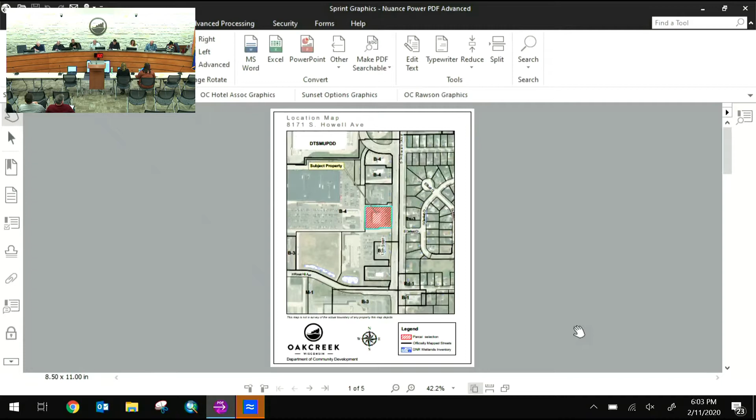Seeing nobody on the third call, we will close the public hearing, and we will go on to 6A, which is consideration of the request for this sign appeal for the Sprint store located at 8171 South Howell. Open it up to the commission.

Mr. Mayor, prior to that, could I give a little bit of background? The master sign plan for this building was actually approved back in '08. The master sign plan only showed signs for 3 tenants. The north tenant was allowed to have 1 wall sign on the east elevation and 1 wall sign on the west. The center tenant, which is Sprint, was allowed to have 1 wall sign on the east. And the south tenant was allowed to have 1 wall sign on the east and 1 wall sign on the south. So this would just allow the Sprint, the center tenant, to have 1 wall sign on the west elevation as well. There are criteria as stated in your packets for granting sign appeals.

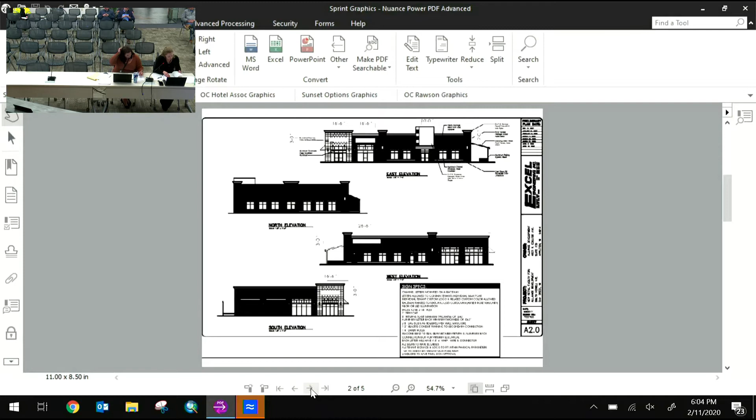Staff does not make any recommendation for sign appeals, and the criteria that the Plan Commission can consider is basically anything other than content. So you can approve sign location, size, and things of that nature. If you do wish to approve this sign appeal, there is a motion for consideration stated at the end of page 2. Thank you, Carrie.

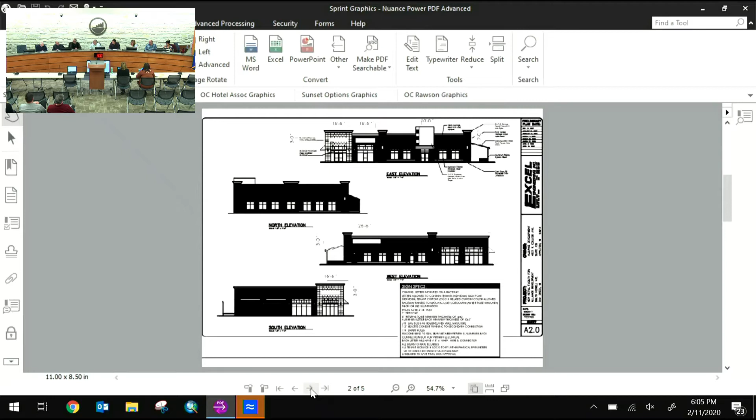Fred: I don't see any problem. I see Buffalo Wild Wings has a sign on the west wall, and I would think there'd be no problem putting the same sign for Sprint. Okay, the size of the sign will match the east elevation if anybody is interested in that particular detail. Anyone else? Don? Chris? Commissioner Sieper, were you here for the last sign appeal?

Christina, anything? Matt? Dawn? I have a quick question - is that door operational? No, that's the service door. Do we need to say that? Does it make it look like it's a storefront? No, I think it actually says riser room on it, or there's some kind of text on the rear door.

Greg? I don't have any issues with it. Okay, just to spread a little history on this, a few of you commissioners might have been around for this. Dawn, you might have been here. Fred, when this building actually went in, we were kind of in our infancy of doing the outer rim buildings, and this building existed. I actually think Sprint was one of the first ones in, I think they actually beat Buffalo Wild Wings in. We went back and forth if they needed that because that was an employee-only entrance, and I don't believe we put it in at that particular time.

But as things have evolved within the city and what we've been doing, I'm fine with it these days. Back in '08, that ordinance that required the particular section of code requiring multi-tenant buildings to have a master sign plan was brand new. We were kind of in our infancy doing signs, it was a new model of building for us. If you've ever been there, there's employee parking on that side of the building, and sometimes that lot's so crowded people are walking around the building.

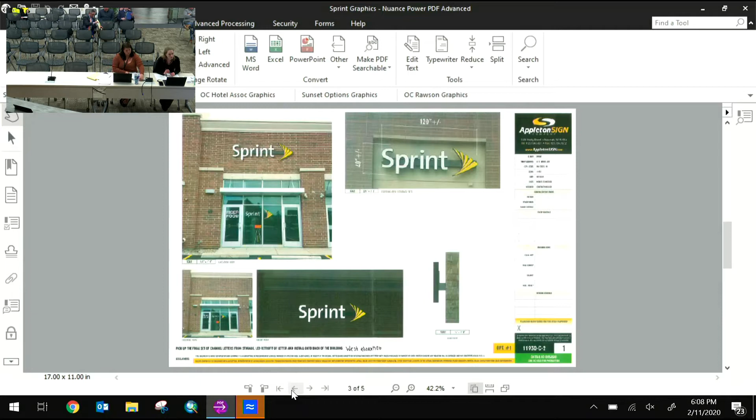Okay, thank you, I completely missed that. Great catch. That will take us - I'm sorry, before we jump to 5B, we're going to stick to 6B if you turn your agenda over. And as Carrie said, it's a review of the proposed master sign plan for the amendment allowing that Sprint sign. So, any questions?

I know Carrie ran over that quick. Don, you're kind of looking like - yeah, so where are we finding 6B on your agenda? It's actually not in your packet that I'm aware of, unless it is. It's a couple in. It's a couple in on the packet then? I guess it's slightly out of order in your packet. That's okay.

But anyhow, that particular property had a master sign plan attached to it, so we have to amend that. Did I say that right? Right, the master sign plan doesn't allow for any signs on the west elevation, so this just brings both of those approvals, the variance plus the master sign plan, together so that they jive.

Odd question, but if it wasn't allowed, how did Buffalo Wild Wings get in? Buffalo Wild Wings was allowed to have one sign on the north elevation and one tenant sign on the east elevation. North? You said west and east. Oh, I'm sorry, the west and the east, not the north. Yeah, okay. All right, clear as mud, eh?

I confused you even more. Yeah, it's one of those situations where the master sign plan still has to be amended. Go ahead, Don, ask your - no, I'm good. Okay, I'm kind of following.

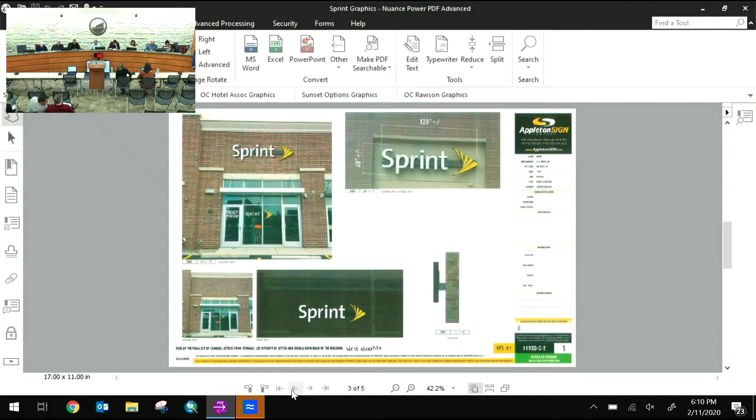Seifert moves that the Plan Commission approves the amendments to the master sign plan submitted by Monica Schneider, Appleton Sign Company, for the multi-tenant building at 8171 South Howell Avenue.

Guzekowski, second. Roll call. Anna, aye. Sullivan, aye. Lorick, aye. Gavich, aye. Guzekowski, aye. Eldani, aye. Seifert, aye. Okay, that'll get us back to the public hearings at 5B, and again, that's a sign appeal for St. John Properties from Monument Sign located at 140 East Rawson Avenue.

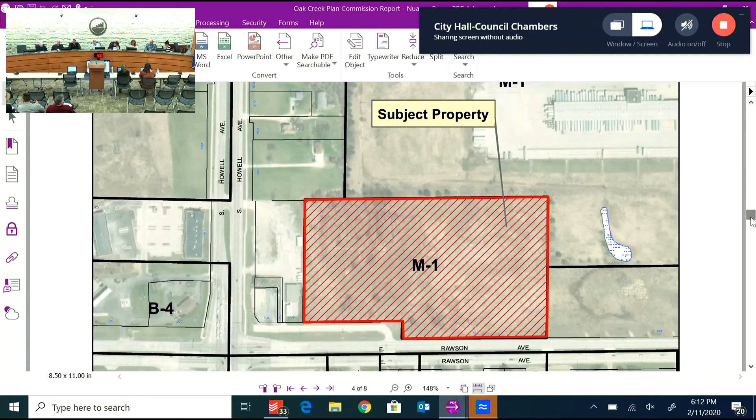We'll now close the public hearing and move on to consideration of that item in 6C. So we'll open it up to the commission.

Questions? Christina? Yes, actually, I do have a question. So I guess I'm not understanding why do we need that variance if we have a certain size that they can abide by? I don't know if the question will be for you or the applicant.

So this actually exceeds the size. I understand, but I'm asking why. Why can't they meet the variance? So this is a directory sign, and due to the number of tenant spaces, there wouldn't be any way to make that smaller and still have the words visible.

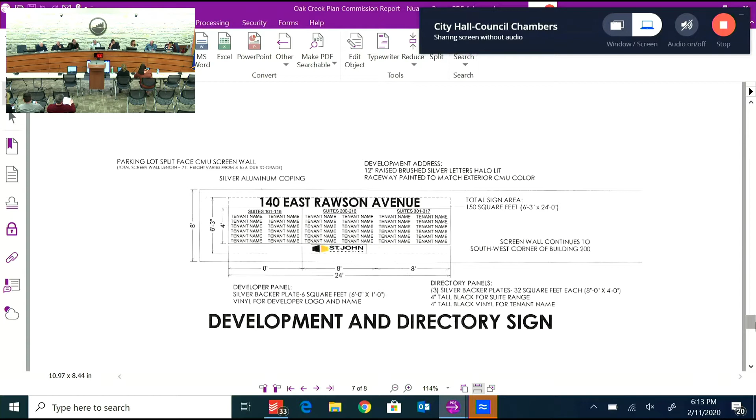And with the location of that new variance sign, would that impact the visibility because it's close to the intersection of Howell and Rawson? The submittal was a little confusing in the beginning. We took it as a ground sign, but technically it really should be qualified more as a wall sign. It's attached to a screen wall that blocks their loading docks, and the wall is connected to building B, so it is set back from the road.

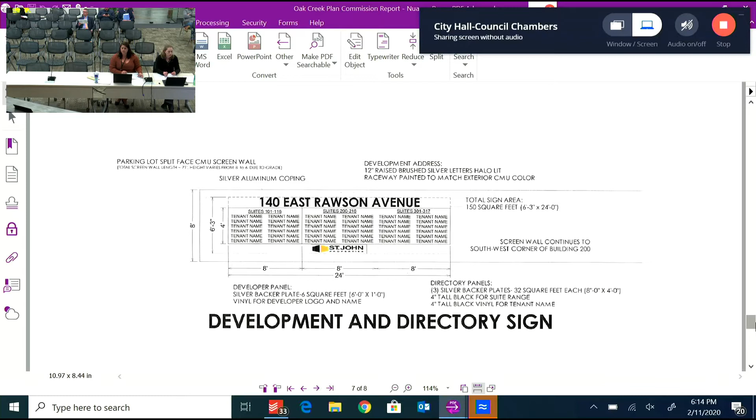All right, that's it. Thank you. Any other questions concerning this particular sign? Fred? Yeah, I just have a question.

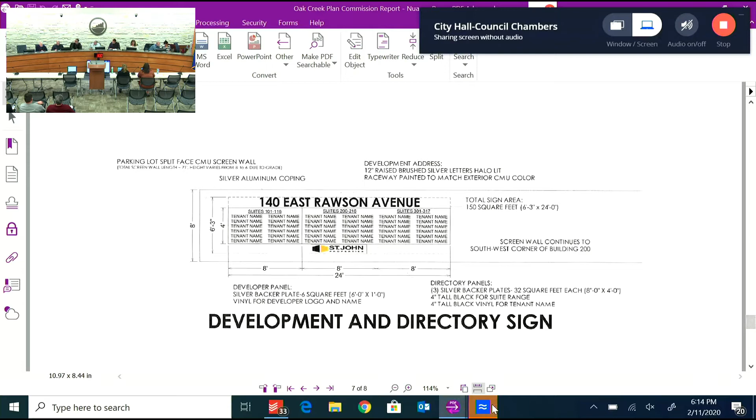I'm just wondering if that sign is big enough to cover the whole facility. That's quite a layout there. There's what, 49 stores or something at that facility? I'm just wondering if that one sign would be adequate enough to cover all of those buildings, or suites, if you want to call them.

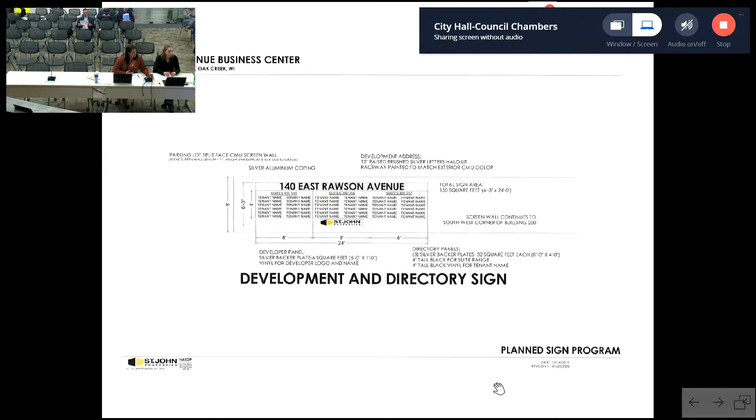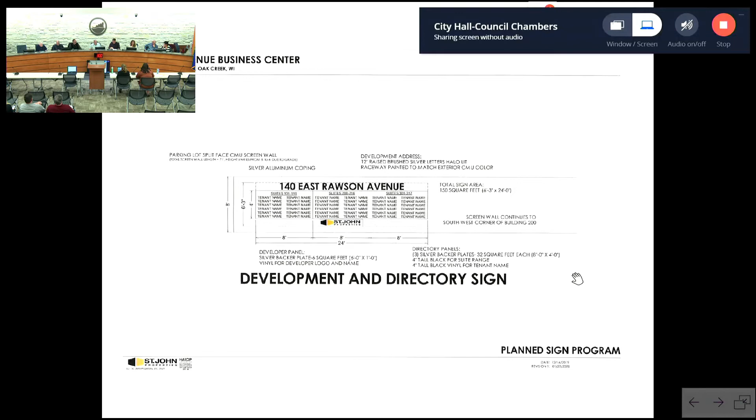Again, kind of something different than we've seen in the past. As Fred pointed out, multi-tenants there. I like the idea of a larger sign. It's tough to see at times. Hopefully it is big enough. I'm not encouraging you to go bigger, but if you feel this works, I'm good with it for the tenants that are involved here. In some cases, as the tenants rent out, they may take 1 to 3 suites, depending on the square footage needed.

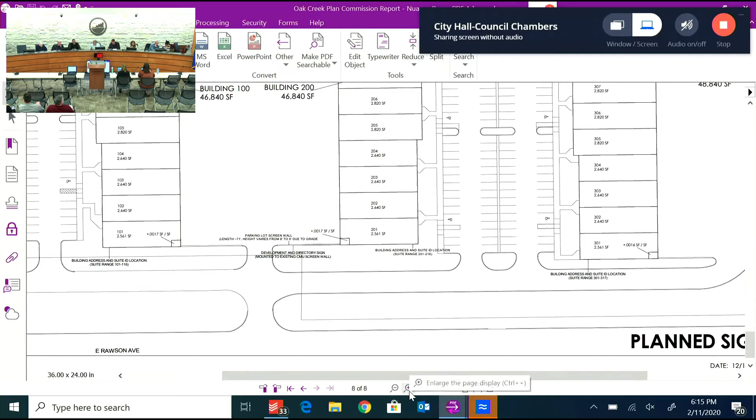Any other questions? Okay, seeing none, motion please.

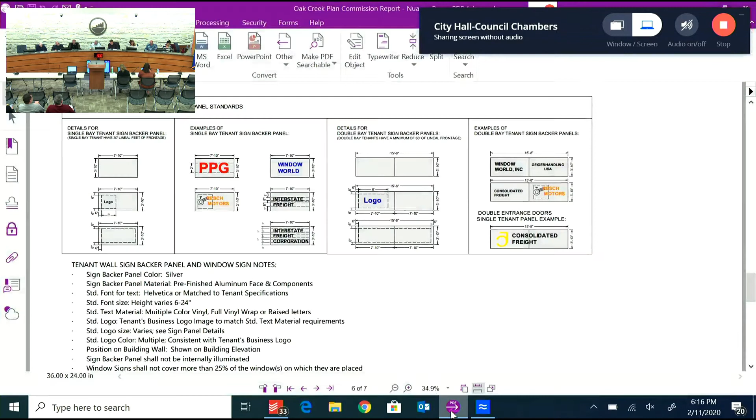Lorick moves that the Plan Commission approve a sign variance allowing the installation of one monument sign of 150 square feet on the property located at 140 East Rawson Avenue. Seibert seconds. Roll call. Sullivan, aye. Grillo, aye. Lorick, aye. Gavich, aye. Guzekowski, aye. Ladani, aye. Seibert, aye.

And item 5C, our last public hearing, again a sign appeal. I'm sorry, Mayor, could I stop you? This also is similar to the previous. Go right ahead. We do have a sign plan review attached to this as well, that is 6D in your packets. So you need a variance on that? No, this is a sign plan for review, the master plan at St. John Properties. So same situation we experienced with the Sprint store. I'll open it up, questions from the commissioners.

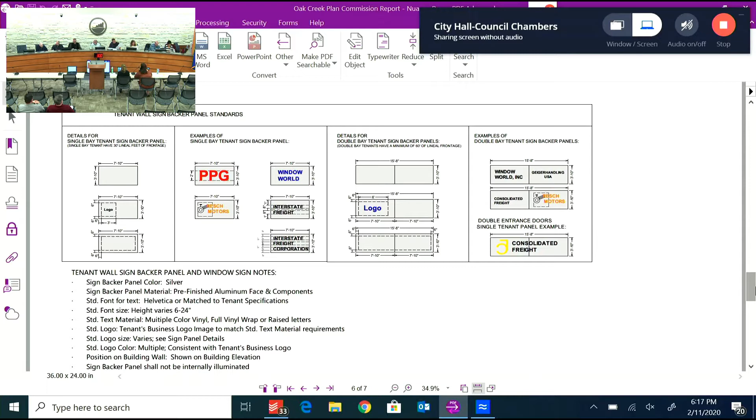So the sign plan review shows the tenant signage above each tenant space. Some have just one bay, and there's a specific signage requirement for that. Sometimes 2 bays are combined to make a larger space for tenants, but there'll still be allowed signage over the tenant space and their entryways.

For me, no questions. Yeah, I have a quick question.

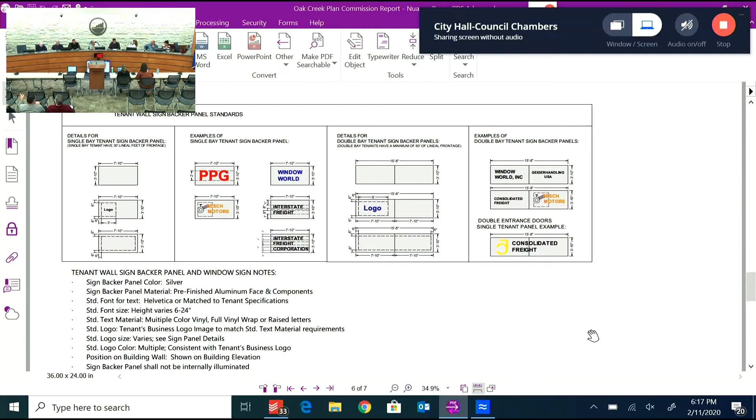So is this backlit? Are these lit? I confused you, we're actually on 6D. So we're at St. John's, I'm at the property. Okay, yeah, look at this. Okay, so you're going back to the sign. Yeah, okay, just the individual signs that are above each suite, are those lit?

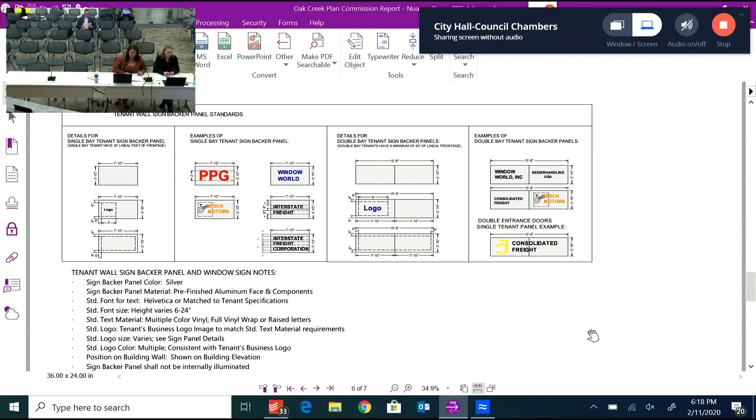It says that there is a non-illuminated metal backer plate that will be installed by the developer. I'm assuming that each bay, though, has an illuminated sign. And you're saying bay but meaning like suite? Or each tenant suite. Okay, okay. I wasn't sure if you were talking about a truck bay.

Any other questions? No question. All right.

6D then. Guzekowski will make a motion that the Plan Commission approve the master sign plan submitted by Dustin at Kulowski at St. John Properties for the multi-tenant building development at 140 East Rawson Avenue.

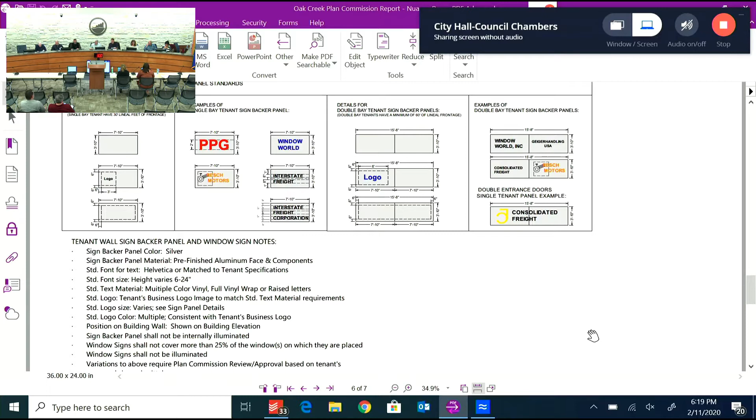Lorick will second. Roll call. Aye. Sullivan, aye. Grillo, aye. Lorick, aye.

That'll get us to our last public hearing, which is... oh, I'm sorry, I guess I got to vote. That's okay, yeah, this is not working really well here for me. Aye. Guzekowski, aye. Ladani, aye.

Seibert, aye. Yeah, I got thrown with the backlit question because we were talking about the master plan. Never mind, okay, never mind. That's on me, that's on me, my bad.

Anyways, okay, we'll fly straight here. 5C, it's a sign appeal. Again, sign appeal for the east elevation for the building at 9700 South 13th. Okay, Lori?

Published January 22nd, 2020. City of Oak Creek, notice of public hearing before the Plan Commission. A public hearing for a sign appeal will be held February 11th, 2020 at 6 p.m. at Oak Creek City Hall, Common Council Chambers, 8040 South 6th Street, Oak Creek, Wisconsin, 53154. Appellant is Ryan Companies, Candace Falk. Tax key number is as noted. Property location is 9700 South 13th Street.

The request is for a variance from section 17.0706, which states that wall signs shall be no more than 200 square feet for buildings more than 300 feet from the street or interstate right-of-way, and the total number of signs on any one premise shall be limited to one wall sign per tenant per street frontage. If granted, the variance would allow the applicant to install one 10-foot by 33-foot wall sign on the southeast corner of the east elevation at 9700 South 13th Street. The zoning of the property is manufacturing district planned unit development. All interested persons wishing to be heard are invited to be present, dated this 15th day of January 2020, Plan Commission, City of Oak Creek, Wisconsin.

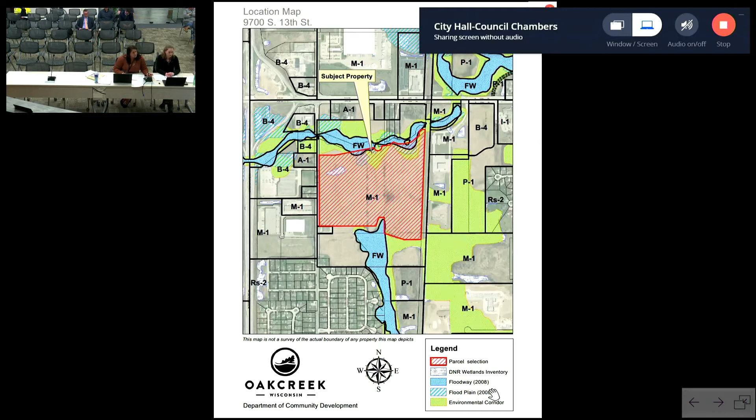This is a public hearing. All those wishing to provide comments on this matter shall approach the podium, state their name and address, and address their comments to the Plan Commission. This hearing's open. Thank you, Lori.

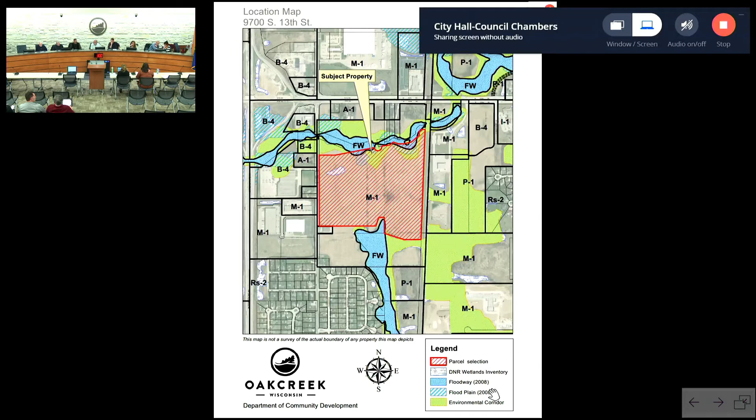We will make 3 calls, this being the first. Second call. And third and final call. We'll now close the public hearing.

Double check where I'm going. 6E is what we're looking at now, and that is consideration of the sign appeal. So open it up for questions from the commission. We touched on this briefly at the last meeting, I believe.

Correct. Yeah, I'm just trying to remember, the minutes don't go into too much detail, and I don't have anything from last meeting. What's the relation to the one from last week? Is this the same sign? Essentially, help me out with this. It mimics one of the similar signs on the opposite side of the building.

The difference is that this is not facing a roadway, and it is on a large scale, 330 square feet, so it does exceed the maximum. This is a different part, this is the east side. We didn't cover that last week, I guess. No, we just focused on the west elevation last time. All right, thank you.

Christina, so this is facing the resident behind it, right? There's a resident area there? Correct, and the railroad tracks. Yeah, and you say this is a very large sign, 330 square feet, and we do have on the screen what it looks like for the elevation. So why do they need it on the east end if it's really not facing a roadway or anything? What's the purpose, I guess? In their narrative, they said that they wanted it for passengers on the train.

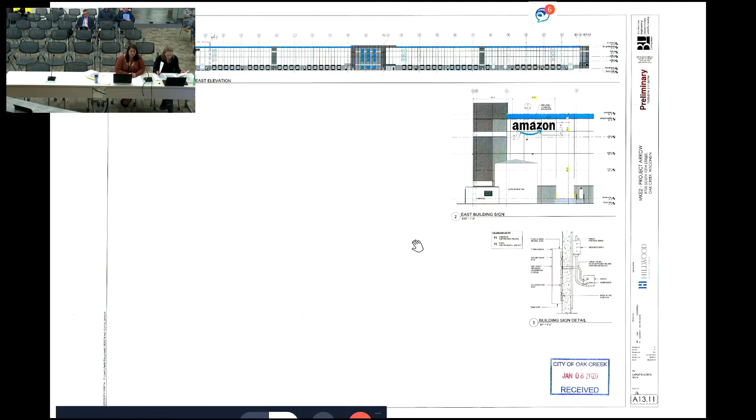Add anything? Don? What about you, Greg? Chris? Don? No. What about you, Fred? No. Okay.

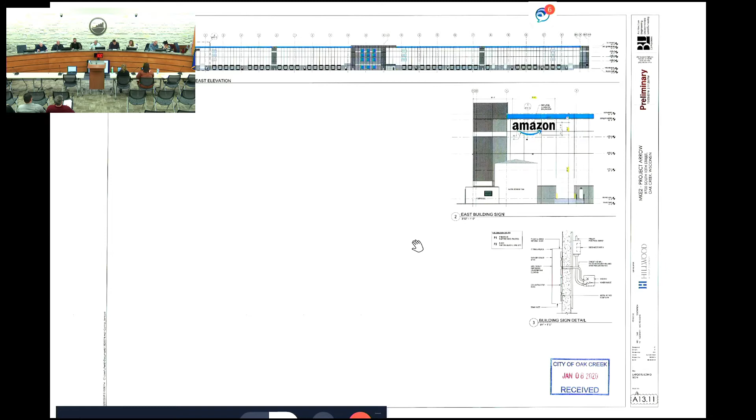Seifert moves that the planning commission approves a sign variance allowing the installation of one 10 feet by 33 feet wall sign on the east elevation at 9700 South 13th Street.

Guzekowski will second. Roll call. Anna, aye. Sullivan, aye. Real, aye. Lorik, aye. David, aye. Guzekowski, aye.

Donnie, aye. Seifert, aye. All right, 6F, it'll give you something different to consider - a certified survey map for the properties at 7869 South 13th Street.

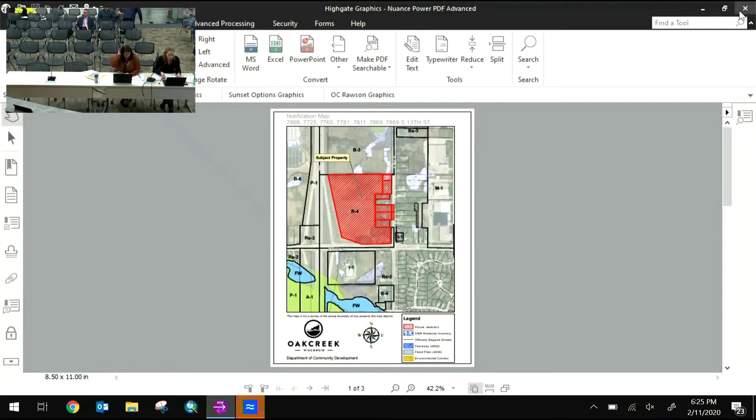Gary? The proposal is to divide the property, which unfortunately is still shown in multiple pieces. It is one piece. The proposal is to divide it into 3 conforming lots for the district.

There are wetlands shown on the property on sheet 2. However, wetlands should be shown on all sheets of the CSM. There is some language for an access easement, and for clarity and consistency purposes the same language should be used as was shown on CSM 9148 - that language is cross-access easement area. It's slightly different on the proposed CSM.

Stormwater ponds are also on Lot 3 in 2 spots. There was a question as to whether or not those stormwater ponds should be shown as outlots on this CSM or if they should be shown on a subsequent CSM.

The benefits to showing them on this CSM would be combining the divisions on one map rather than several over many months or even possibly longer. It would potentially include easements for the benefit of, and the maintenance responsibilities per lot for, the stormwater infrastructure, and it would also prevent potential encroachment of development into these stormwater facility areas.

To get at this though, rather than dividing the individual lots, it is possible that we just change the language on Lot 3 to Outlot 3 for now, with subsequent divisions happening at a later date that could change and you could create lots still. It will be up to the Plan Commission to determine whether this will be a condition of approval, or if we're going to designate the stormwater infrastructure on a subsequent CSM as outlots.

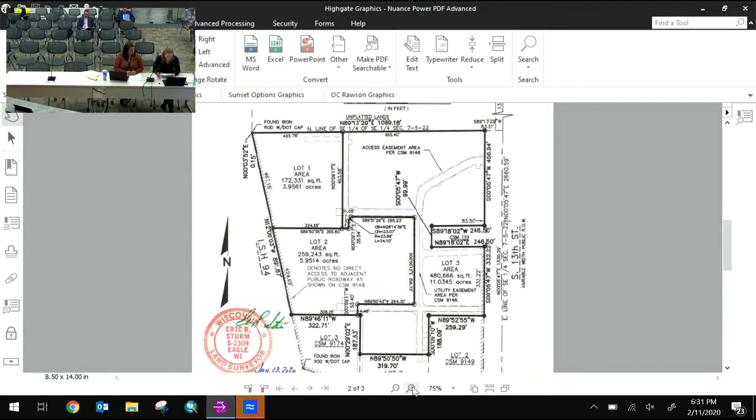So in that case, I would suggest an additional condition that Lot 3 is changed to an outlot prior to recording.

Ready to go? Motion? Lorick will move that the Plan Commission recommend to the Common Council that the certified survey map submitted by John Thompson Highgate LLC for the property at 7869 South 13th Street be approved with the following conditions.

Number 1, that the CSM is revised to incorporate all wetland areas on all sheets. Number 2, that the CSM is revised to incorporate the same language for the access easement as was shown on CSM 9148. Number 3, that all technical corrections, including but not limited to spelling errors, minor coordinate geometry corrections, and corrections required for compliance with the municipal code and Wisconsin statutes, are made prior to recording. Number 4, that Lot 3 be changed to Outlot 3 prior to recording.

Seifert seconds. Roll call. Hannah, aye. Sullivan, aye. Carlo, aye. Lorick, aye. Gavich, aye. Guzekowski, aye. Tanya Seifert, aye.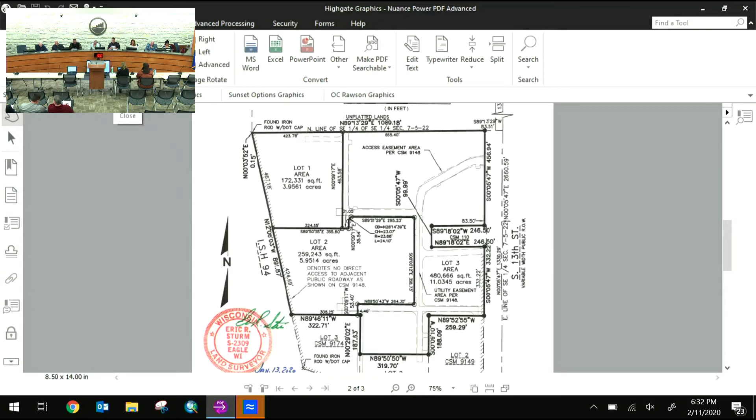Okay, 6G, review a request from Hotel Associates for a conditional use permit for a hotel on a property at 9315 South 13th Street. Carrie? The proposal is for a hotel, a new brand called the Avid Hotel.

Plan commissioners will recall that a PUD amendment allowing hotels within this particular area was approved by the Common Council on January 7th of this year. We still need those signed conditions and restrictions prior to any further review of a proposal for the hotel on this property, but we did incorporate the conditions and restrictions approved by the council in your packets for reference.

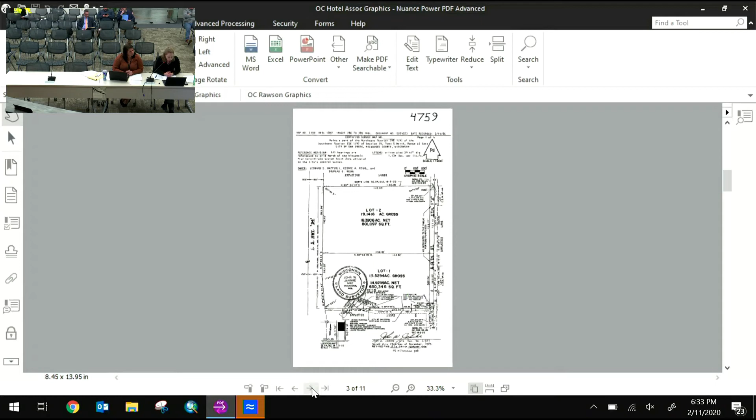The plan is for a 95 guest room hotel in a 4-story building. It's a mid-scale hotel under the Avid Hotel brand, a franchise of InterContinental Hotels Group, or IHG. The plans currently include a workout room and gym facility on the first floor. There are an estimated 25 full-time equivalent employees anticipated, and this will be a 24/7, 365 operation.

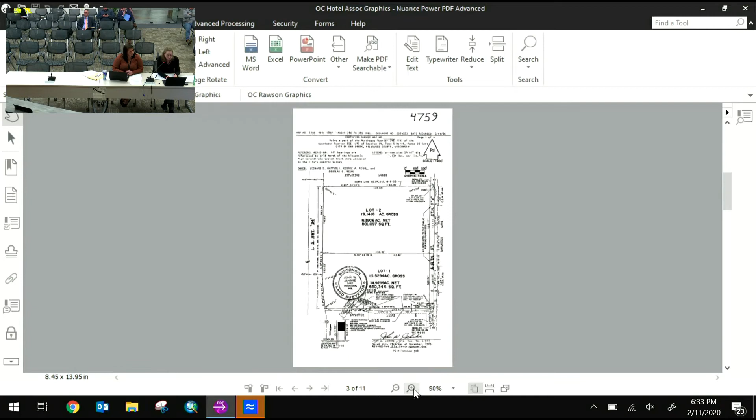This gives you an idea of how the access will be configured for the proposed hotel. This CSM shows the division between the hotel lot and the Steinhafel's lot. If you look at the very bottom of Lot 1, that includes utility and cross-access easements. That's how the parcel will be accessed from 13th Street, sharing the existing access with Steinhafel's.

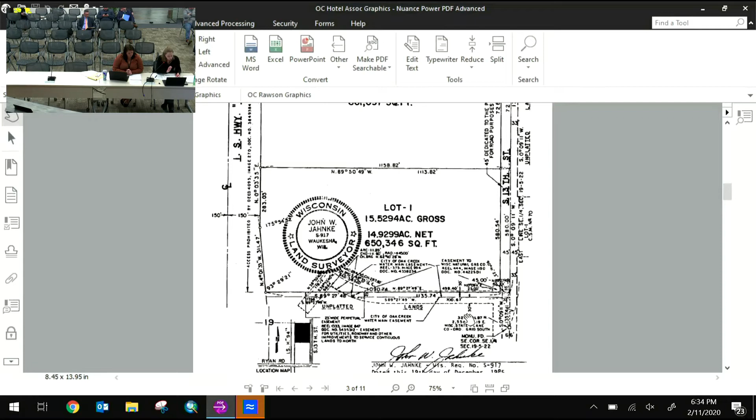They're also showing a total of 100 surface parking stalls for the hotel. Anticipated construction is to begin in the spring and summer of 2020, if approved, and be completed in 9 to 10 months, with a projected open date of summer 2021.

Minimum parking requirements for motels and hotels are calculated at 1 stall for every room or suite, plus 1 stall for every peak shift employee, plus 1 stall for every 3 persons based on max capacity for each public meeting or banquet room. But there are no public meeting rooms or banquet rooms proposed in this hotel, meaning they would need a minimum of 120 stalls per code.

Since the concept plan shows 100 stalls, it would be at the Plan Commission's discretion to determine whether this is adequate. I'll mention that the narrative supplied by the applicant included information on hotel occupancies in the area. Assuming the proposed hotel would experience roughly the same occupancy as similar mid-scale hotels in the area, at 68.7% per their submitted narrative, approximately 65 rooms would be occupied at any given time. That type of occupancy would require a minimum of 90 parking stalls, so we're somewhere between 90 for the majority of rooms occupied and 120 at max capacity.

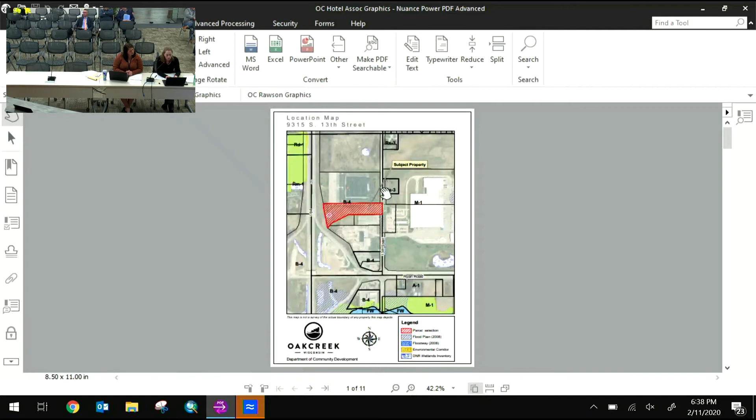Okay, questions from the commission? Christina? I have a question. I see two access points here off of 13th Street. Are they both entrance and exit, or one entrance and one exit? Actually, this is a little confusing. The entrance is actually over on 13th Street here. What's shown on the site plan is actually two access points off of that internal access drive shared with Steinhafel's. So what you're seeing to the north is actually Steinhafel's parking lot. So there's only one access from 13th Street.

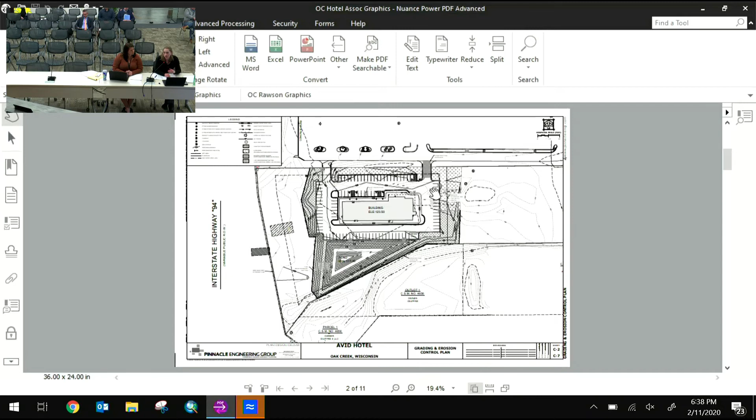Correct. How about, did we look into left turns into that property, since it doesn't interact with the actual road because there's no median there? So where are people going to start to turn left in? That information has not been provided at this time. However, the CSM did provide that common access. So if there's any requirement per the county for turn lanes or any modifications to that access, we would require a copy of that approval and those requirements. I just want to make sure that's being looked at while we're approving the CSM that's being applicable. Obviously, whatever the county requires, they're going to require.

Sorry, Chris, you had something? Yeah, couple of questions I have. So the green space, I agree, Mayor, I'm concerned about that, but I'm glad we have, what's it, 30% we need to have, or 20? Is it 30? 30, yeah. This is kind of a fresh look for this side of town with having a hotel.

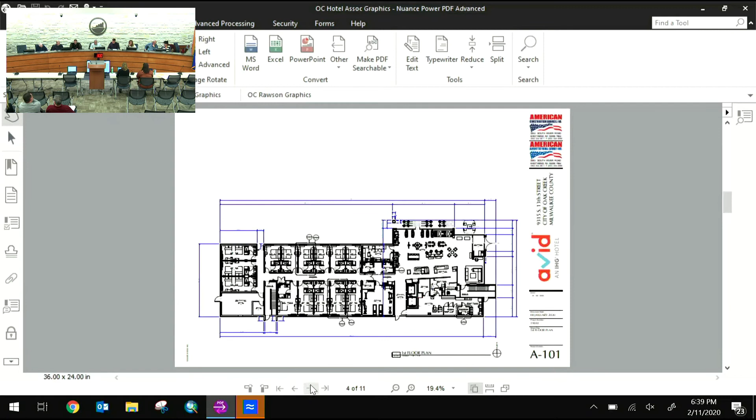One of the concerns I have is, could it ever be turned into, or if it were ever sold and used as an extended stay? Is there any language we can have in the document that prevents it from becoming an extended stay? You can explore that option as part of the conditions and restrictions. Unfortunately, I don't have any kind of language I can provide you at this time.

And I do think it is a nice, fresh look, very contemporary. Typically, the types of amenities provided in extended stay hotels don't necessarily include things like pools and fitness facilities. That might be one way of getting at it, but again, those are just ideas. We would have to speak internally about what the language would be in the conditions and restrictions.

Yeah, and that's my concern. My hunch is right now, obviously, it's not going to be that, but down the road, I know residents who have contacted me about it. Back in the day, there were other conversations about an extended stay on our side of town, and they weren't happy about it.

And mixed opinions about this now, but it's been approved by the council, so I think it's a good fit for what we've got here.

Anyone else? Don, more of a procedural question. So we're looking at a motion to approve the conditional use permit, come back with the conditions and restrictions, and then a public hearing before it goes to the Common Council?

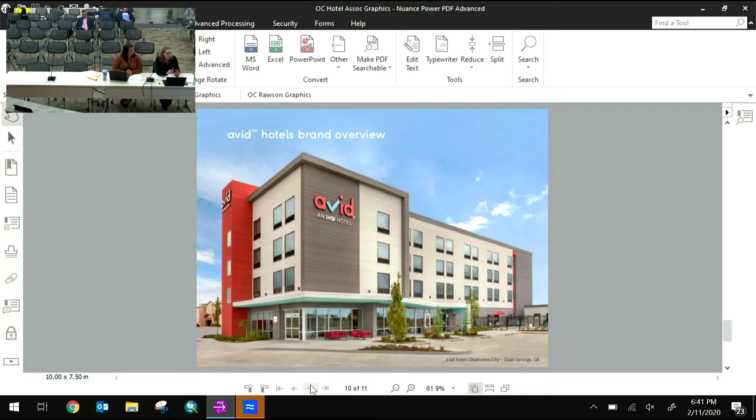Okay, and then any subsequent review that would be required following Common Council approval at the public hearing would come back to the Plan Commission. So site, architectural, all that kind of thing would normally come back to the Plan Commission as well. Okay, thank you.

Matt? Dawn? Greg? How about you, Fred? I think I'm okay.

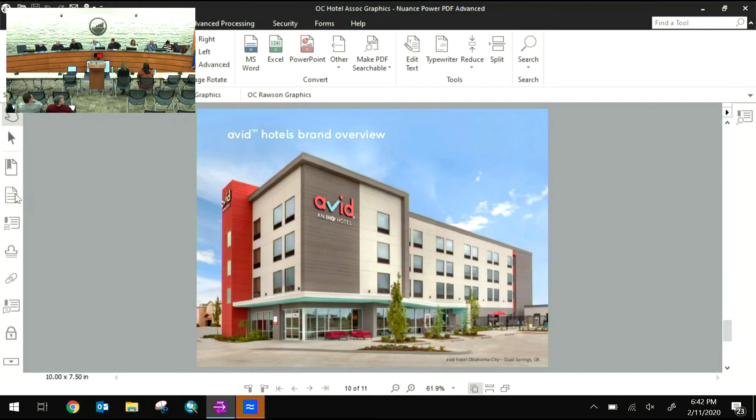May not be the greatest question in the world, but Assistant Chief Havey, any concerns about the parking and your accessibility with one entrance off 13th? I know you could always utilize the north entrance of Steinhafel's as well, but given the sea of parking and if they do load up, any concerns?

Have you worked with them yet? Mike Havey, Assistant Chief. We have not worked with this group yet. Access is always a concern, but with Steinhafel's and those access lanes on each side, and then the two access lanes that are in the plans right now have access lanes on either the east and west side. Parking restrictions and access are always a concern for firefighter operations. Nothing specific to this plan yet, though.

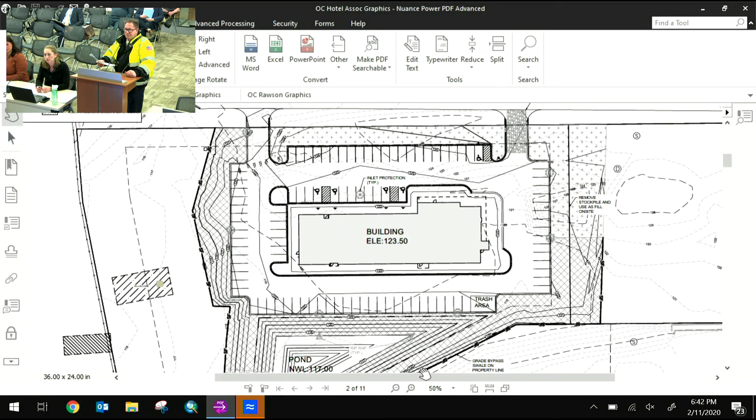Okay, thank you. No, I think Christina brings up some valid stuff on 13th. The county is planning on redoing that road in the near, far future, who knows when. But 13th will get reworked, and hopefully we'd get a turn lane in there at that particular time. So I have nothing other than that.

So, motion then, please, on G. Guzikowski makes a motion that the Plan Commission recommends the Common Council approves a conditional use permit for a hotel on a property of 9315 South 13th Street after a public hearing and subject to conditions and restrictions that will be prepared for the Plan Commission's review at the next meeting.

Seipert seconds. Roll call. Anna, aye. Sullivan, aye. Brillo, aye. Lorick, aye. Gavich, aye. Guzikowski, aye. Donnie, aye. Seipert, aye.

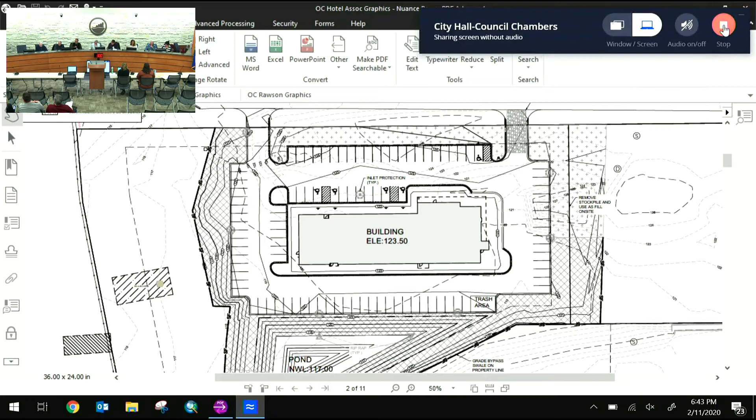Gets to 6H, and it's a temporary use permit for Ozinga for a temporary portable ready-mix concrete batch plant and crushing operation at 841 West Rawson. Lori.

Did I get it right? I got it right. I'm catching on to this stuff.

Ozinga Ready Mix Concrete is requesting a temporary use permit that would allow for a concrete crushing operation on the property located at 841 West Rawson Avenue until December of 2020. Plan commissioners may recall that they've come to us several times for the same permit request, once on March 13th of 2018 and another on September 10th of 2019. The previous request just expired at the end of 2019.

Since then, they've approached staff to issue 3 consecutive 14-day temporary use permits for the same crushing operation. They'd like to bring in front of you the possibility of extending and having a longer temporary use permit that will go to the end of 2020 to meet crushing demands. The details of the operations are all found within your packet.

Staff would like to mention, though, while the proposed use is suitable at this location and is consistent with the existing permanent use of this property, staff would like to suggest that the number and duration of temporary use permits makes this use no longer temporary. Staff will work with Ozinga to find a more permanent solution through the conditional use process. And then a suggested motion is provided for you.

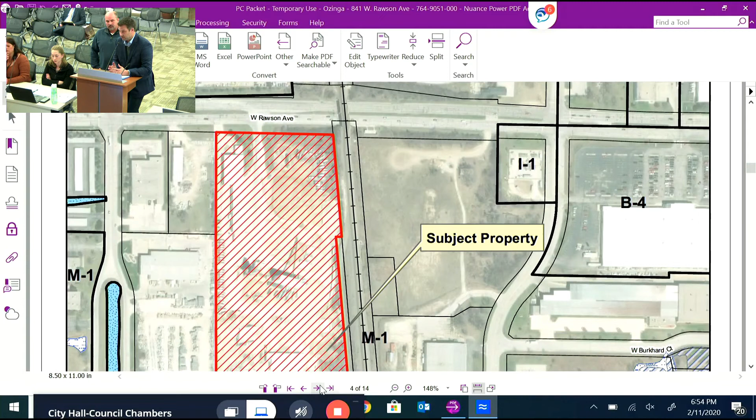I'll take a look at things first thing tomorrow morning when I get back into the office and talk to the operations manager. If it's freezing temperatures, the street sweeper just isn't going to be there, but we're typically not crushing in those conditions either. And it makes sense, I agree, it's not going to be a sweeping truck behind every single hauling truck, so that doesn't make sense. But at least at the end of the day, there should be one going around by the end of the hauling schedule. Absolutely.

Again, I think I'm okay with the time limit on this, coming into the busy season. These portable batch plants aren't unique to Oak Creek — they're going up all over the place along I-94 where needed, basically to limit the hauling and make it more efficient. So I'm okay with the operation.

So, okay. Motion then. Donnie moves that the Plan Commission approves the temporary use permit for a temporary crushing operation at 841 West Rawson Avenue with the following conditions.

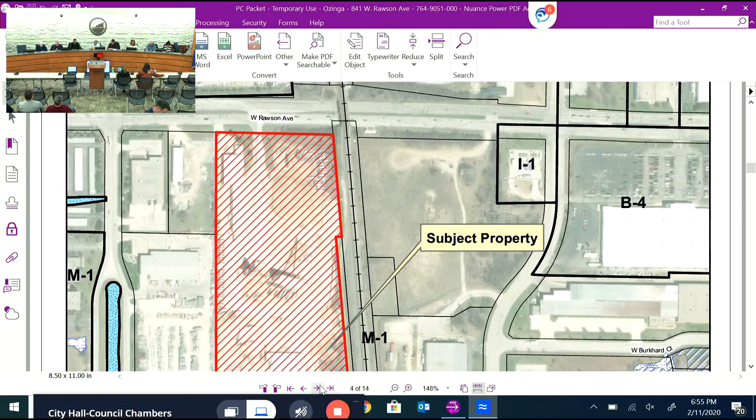That all applicable building and fire codes are in effect. That the hours of operation for crushing be limited to Monday through Friday between 7 a.m. and 4 p.m. That the temporary use shall expire on December 31st, 2020. That the crushing is limited to Ozinga concrete, with no materials from other properties or work sites brought to the site. That on-site airborne dust and debris control measures are utilized throughout the operation. That stockpiles are restricted to the locations shown on the approved site plan and may not exceed 30 feet in height. That any truck traffic associated with the temporary use is restricted to state and county highways.

That a street sweeper is utilized a minimum of once per day. That the property is returned to its original condition, with all temporary equipment and stockpiles removed within 14 calendar days following the expiration of the temporary use permit.

Seibert seconds. Roll call: Anna, aye. Sullivan, aye. Will, aye. Lorick, aye. Kavich, aye. Guzikowski, aye. Donnie, aye. Seibert, aye. Thank you, guys.

Next, we have a plan review for an addition to Sunset Options for the building and the property located at 904 West Rawson Avenue. Carrie.

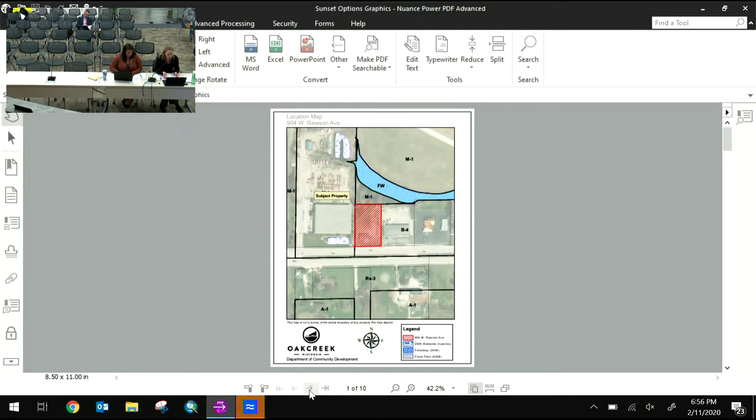This is an addition to the existing building, and the purpose is for chapel, restrooms, and a lobby reception area on the north side of the property.

This is an existing layout for the site, and what is proposed is this addition here. This is going to be a 51-foot by 35-foot addition on the north, connected to the existing building via a small alcove and mechanical room. There's also going to be a covered canopy area for the drive on the east side. You can see the island there.

Minimum parking requirements are the greater of one space for every 4 patrons at max capacity, or 25 spaces per chapel unit, plus 1 space per peak shift employee. So the chapel can accommodate 60 to 75 patrons, which would be 15 to 19 parking stalls. Per the information provided by the applicant, there would be at least 1 employee during regular operating hours, which are 8:30 to 4:30, but additional employees may be required during services or visitations.

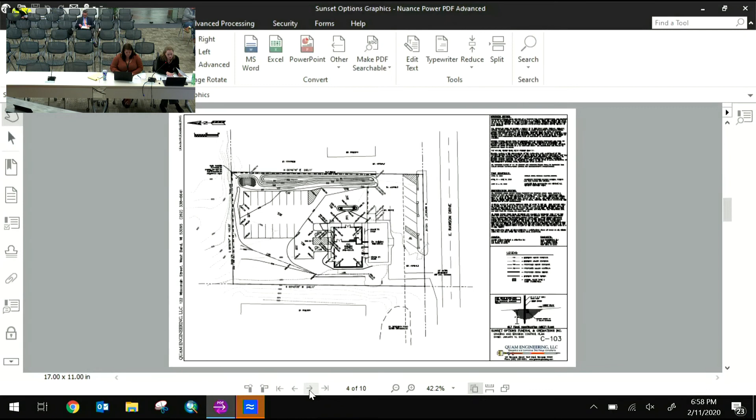As proposed, everything meets setback requirements. The proposed exterior building materials for the addition will match what is existing for the building. That includes manufactured stone veneer along the base, which has to be a minimum of 4 inches per code. That requires a 3/4 majority approval per code for the use of manufactured stone as opposed to natural stone. There's also going to be wood siding to match the existing, which is also not listed as an approved material. However, with a 3/4 majority approval of the Plan Commission, that can be approved. And then asphalt shingles to match.

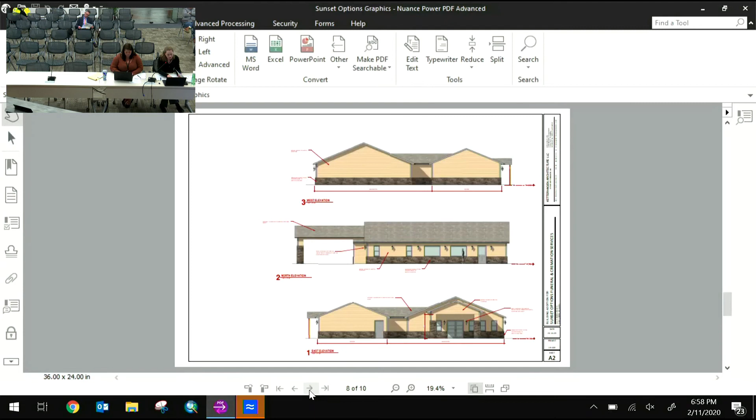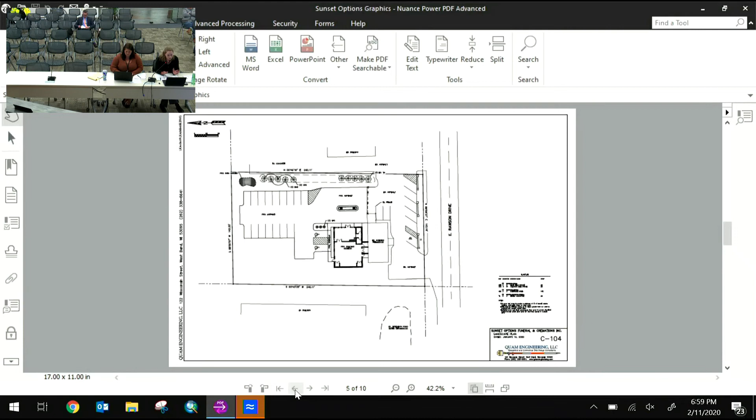In the landscape plans, they do not actually show any mechanicals, save for an existing gas meter on the west side of the building currently. If there are any mechanicals, they must be screened, be that ground, building, or rooftop. That includes transformers, that includes any kind of mechanical equipment itself, basically anything that would be considered a box, for lack of a better word.

This on the screen right now is the proposed landscaping plan. What you can see here is that there is some existing landscaping on the east, and then some proposed on the northeast. Code requires that parking lots serving more than 5 vehicles shall be provided with accessory landscaped areas, which may be landscape islands, peninsulas, or peripheral plantings totaling not less than 5% of the surfaced area. In other words, we need a little bit more landscaping shown.

Also, there are some details missing that are required per code. That includes plant coverage, planting height versus mature height, spacing, those kinds of details. So we will work with the applicant to ensure we get a landscaping plan that meets the code requirements.

We also have green infrastructure requirements. Those are being coordinated with the neighbor as well as with the city. We have a request for well abandonment to be coordinated with the utility and with inspection. They are considered a utility customer, so that's something they'll have to coordinate with the city. The fire department has given us some indication that they will need to review the fire suppression requirements. It was not clear at this time what those would be.

If the Plan Commission is satisfied with the proposal, there is a suggested motion that the Plan Commission approves the site, building, and landscape plan submitted by Leroy Stewart Sunset Options for the property at 904 West Rawson Avenue, subject to conditions 1 through 7.

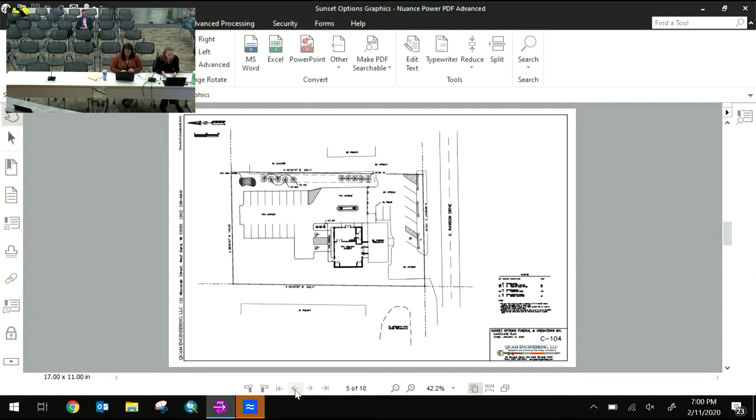Chris? I'll say that I'm excited to see that. It seems like, I don't know, maybe last year, but probably a lot longer than that. But 2 years ago, you guys were just here to get some other work done, and now you're here to add on. So you were going to spruce it up to start. You guys are doing a great job over there, and it's just great to see you want to put the money back into Oak Creek and call Oak Creek your home. So thank you very much. It's a good-looking building.

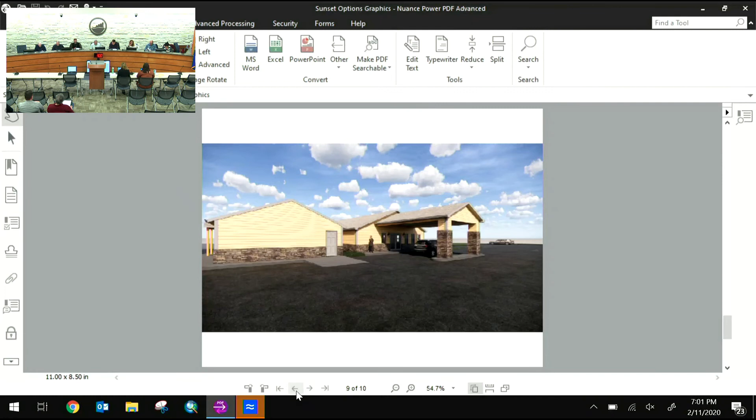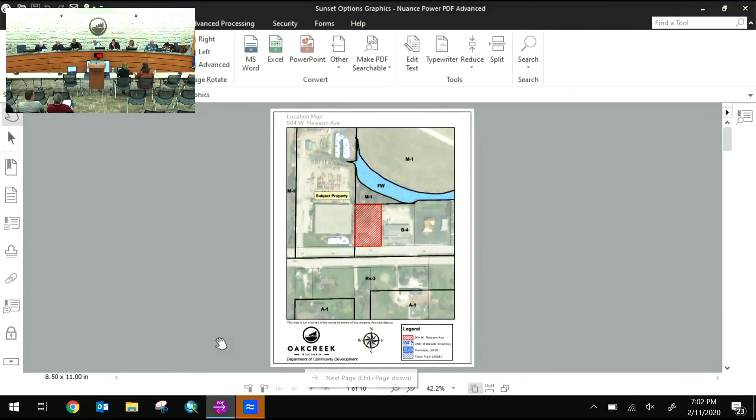Is there a rendition of the south? The view of it from the south, looking north? Or is that east? I don't think we have an exact rendering, but...

It almost looks like it's going to mimic what's already there. Yeah, I guess what I'm looking at is what I take as the existing building with that single door before they have the drive up. That'll be, I mean, it's facing east, correct? Okay, oh I'm sorry, I'm not following you.

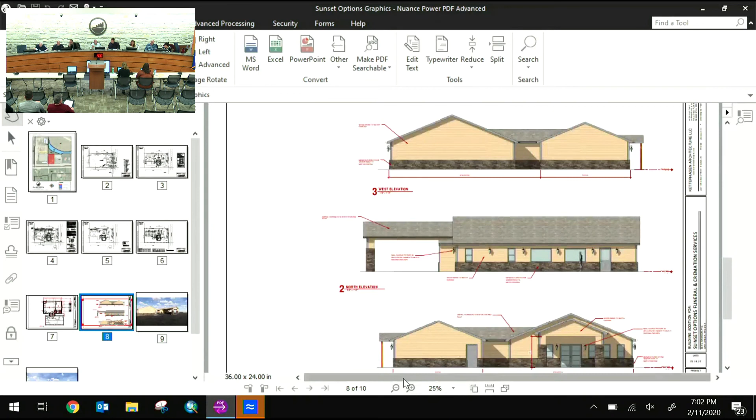But what's going to be the view if I'm standing on Rawson looking north at it? Is that the view? This is the east elevation. Okay, right, yes. So this would, if you can bear with me for a second, I'll bring up Google Street View.

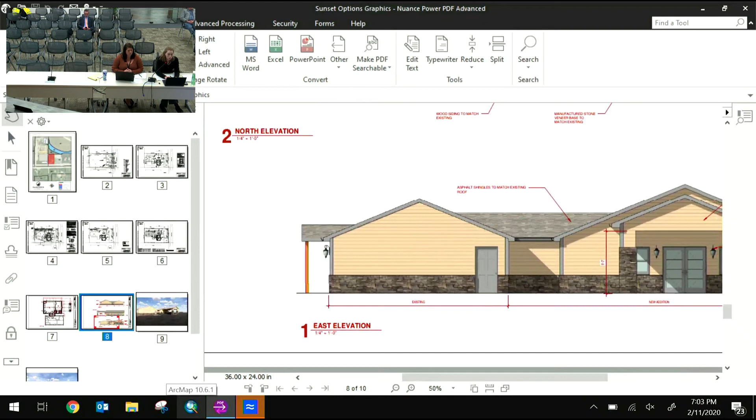Kind of weird, we got 2 elevations and there's actually 4, right? Well, the addition is on the north, so that's why you only had the 2 elevations.

So this is what the existing building looks like. Everything's going basically to the back, everything's going to the rear, which is the north. So if you can see where my cursor is, that's where that new addition will be.

See the drive-through canopy sticking out on the side, and the addition. That one side was just kind of blank. Looks okay.

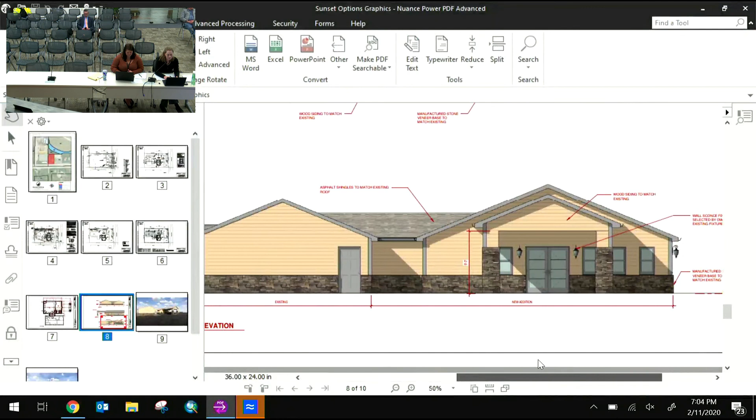Thank you for that, I needed the visual. Tough night for me. So I have nothing else. Again, unique little business and love to see it growing. As Chris said, you guys are just in here for a remodel. Yeah, come on up please if you want to say something.

So actually, Mr. Mayor, I think this is the rendering that you were looking for. Yeah. You want to say something, sir? Just name and address please, for the record. Steve Ketterhagen, architect of record, 2821 Virginia Street, Racine.

I would like to address condition 2, requiring 4-inch stone. 2 years ago, we did use a 2-inch stone veneer, and we were not aware of the requirement for 4-inch. So we wanted to match the existing materials, and we would like to continue to use the same materials we used 2 years ago.

Man, that one's a touchy one with us, ain't it, Carrie? If it's to match the existing, and if we have at least a minimum of 2 inches, the Plan Commission does have the discretion to grant a modification.

When we get into the drive port or the vestibule, whatever you want to call it, on the columns, could that be 4 inch? We could investigate that, it's possible, but we want the product to match as well. For sure, I get it. You want the belt line to match up, but if we could try to get as much of it right as we can, that would be appreciated.

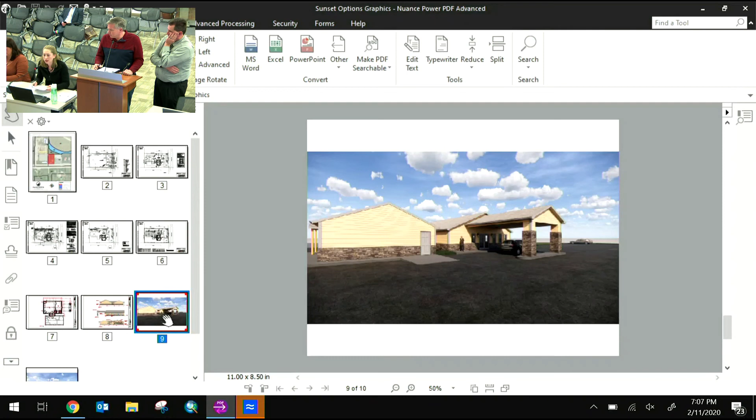Familiar with it, Carrie? I'm not, but that's not to say that it isn't already being used. It still needs a 3/4 majority approval.

Christina, Matt. All right, good. Anything else? No, sir. Okay, motion.

Lorick moves that the Plan Commission approve the site, building and landscape plans submitted by Leroy Stewart Sunset Options for the property at 904 East Rawson Avenue with the following conditions. Number 1, that all relevant code requirements remain in effect. Number 2, that the exterior stone veneer meets the minimum 2-inch deep to match existing materials. Number 3, that the plans are revised to include locations for all new and relocated mechanicals, transformers, and utilities. All mechanical equipment, transformers, and utility boxes, ground, building and rooftop shall be screened from view.

Number 4, that the landscape plans are revised to include all requirements per code. Number 5, that the green infrastructure plans are revised to retain all water on site, or that a copy of a signed agreement with the adjoining property owner to allow drainage across property lines is provided to the city prior to submission of permit applications.

Number 6, that all water and sanitary connection requirements and well abandonment procedures are coordinated with the Oak Creek Water and Sewer Utility and Inspection Department prior to submission of permit applications. And number 7, that all detailed revised plans are submitted in digital format to the Department of Community Development prior to submission of permit applications.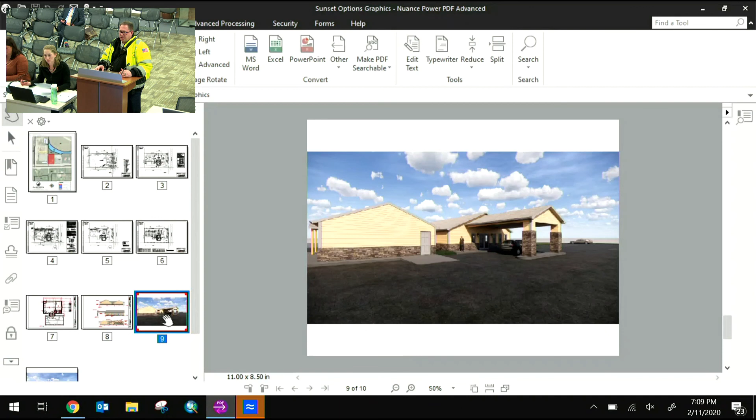Mike Havey, OC Fire. What we're working on now is just the square footage of the addition, to have that evaluated to see that the fire suppression or detection system fits what the square footage of the building needs. Is it currently sprinkled? Don't believe that one is.

Mayor, to your question, number 1, all relevant code requirements covers it. Yep. Thank you. Guess that's what I'm looking for. Thanks, Mike. Okay, roll call, please.

Anna, aye. Sullivan, aye. Grillo, aye. Lorick, aye. Gavich, aye. Guzekowski, aye.

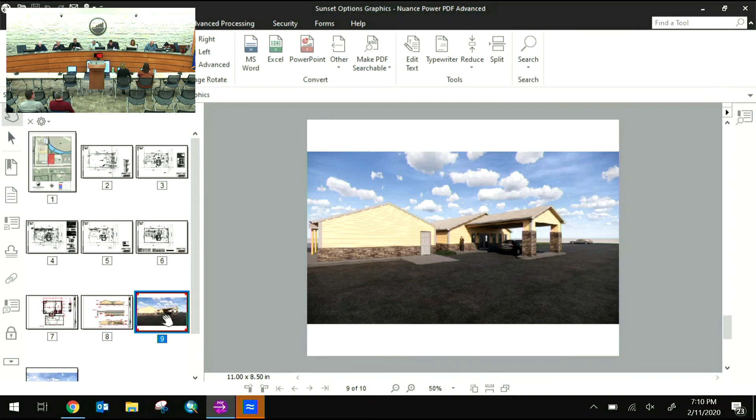Ladani, aye. Seifert, aye. And J, review conditions and restrictions for Oak Creek Rawson Industrial LLC for a conditional use permit for a freight yard terminal transshipment depot on the property at 610 West Rawson.

Gary: So if you'll recall, the Plan Commission recommended approval of this conditional use permit at the last meeting on January 28th. So what we are here for now is to talk about the conditions and restrictions. If you turn to page 2 of 6 under site and use restrictions, maintenance and operation requirements, it allows all uses limited by the M1 manufacturing district, conditions and restrictions, plans approved by the Plan Commission on November 27, 2018, and all applicable sections of code.

No parking or storage of vehicles, equipment, merchandise, parts, or supplies within the designated public and employee parking areas. Outdoor storage shall be limited to the parking of trucks and trailers associated with the business and shall be located in designated and striped stalls in the north portion of the property. That's already in place per the approved site plan. There shall be no storage of unlicensed, non-operational vehicles, equipment, merchandise, parts, supplies, or any other materials.

We have requirements for all parking areas to be striped and landscaped in accordance with the approved site plans and applicable codes. Any change to the occupancy of the site or the building shall conform to all building, fire, and municipal code requirements. And the rest is solid waste collection and removal of snow. Those are all the responsibility of the property owner.

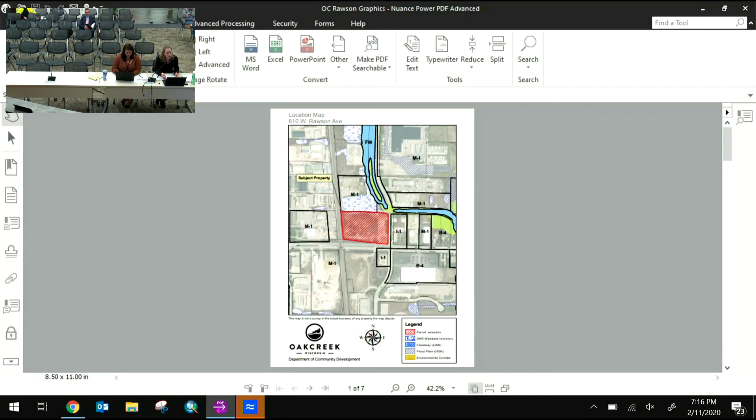Okay, thank you, that's it. Anybody, anything else? If not, motion please.

Lorick moves that the Plan Commission recommend that the Common Council adopt the conditions and restrictions as part of the conditional use permit for freight yard, freight terminal, transshipment depot facilities within the multi-tenant building on the property at 610 West Rawson Avenue after a public hearing. Seifert seconds. Roll call: Hannah, aye. Sullivan, aye. Grillo, aye. Lorick, aye. Gavich, aye. Guzekowski, aye. Aldani, aye. Seifert, aye.

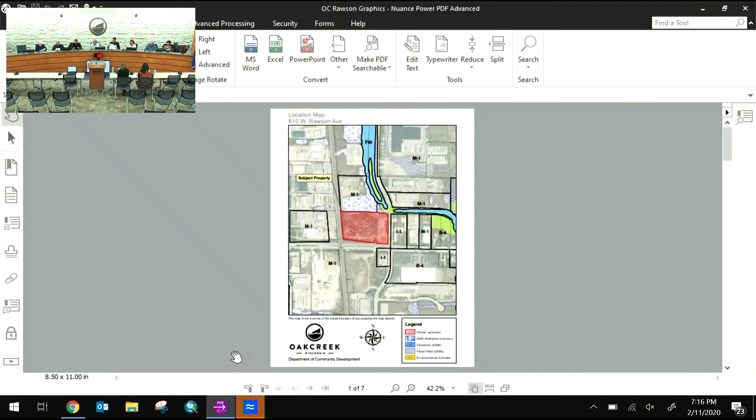Before we adjourn this weekend, we kick off our Winterfest weekend. It starts off Valentine's Day, February 14th, with a date and skate night in the square. We're going to have a pop-up ice rink, specials for dining, and refreshments for sale. So if you're looking for a cheap date, Drexel Town Square is the place to be on Valentine's Day. Followed up on Saturday by our Winterfest, which kicks off at 10 a.m. and runs till about 4.

There's horse rides and hockey, and a host of things going on: ice sculpting, ice bars, sales of goods, and a winter craft fair. This is our 3rd annual Winterfest. We're also holding a skate park workshop, providing an opportunity for residents to give input on the last 3 concepts, which will be set up as a booth at Winterfest.

Thank you for that, Laurie. That's very important — this skate park is pretty monumental within our parks. We've had one for many years, but we're putting in a permanent one. A lot of effort and planning has gone into this, so this is the time for public input if you're going to come and look at the 3 revisions. Thank you for that, Laurie.